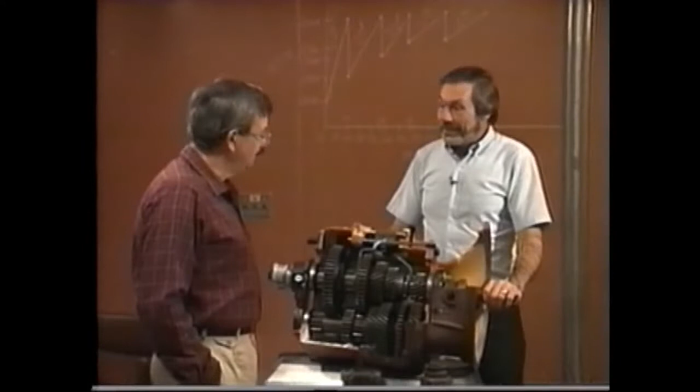We have a cutaway transmission here. We're going to show you what happens in the transmission related to what you do when you move the gear shift lever in the bus. We'll also tie together how you synchronize gears, find shift point matches, and that kind of thing.

We have a graph on the board that we'll deal with in a minute, and I'll have you fill one out. But mainly right now I'm interested in you understanding how this transmission works, because it's important for you to understand that so you know how to shift it and match the gear selections right, okay?

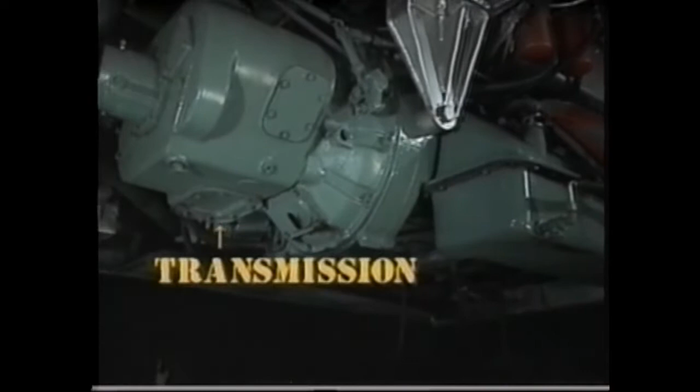Now, first of all, this is the part of the transmission that hooks to the back of the engine. If you remember the movie we looked at, The Powertrain, it showed basically how a smaller transmission works. You remember the U-joints and the drive line? Well, that hooks on right here and goes to the rear wheels, okay?

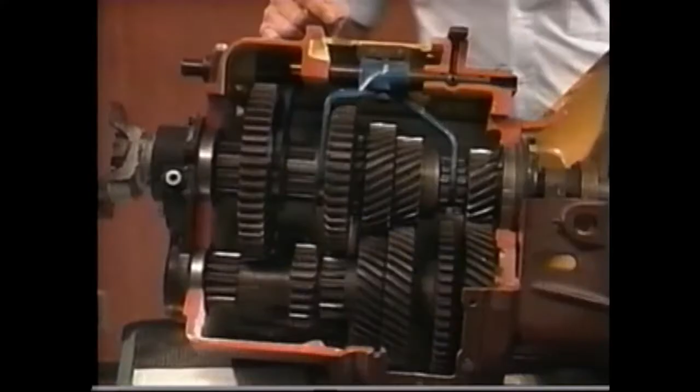Now I'll explain what the engine set of gears are first. Anytime the engine is running and the clutch is out, the gears you see turning here are turning with the engine. Now, correspondingly, we have a set of gears that are hooked to the back wheels. So when the back wheels turn, those gears turn.

Now, the important part to understand is that in each gear position — first, second, third, and so forth — there's actually two gears that make up that gear position. So if I say, John, put it in first gear, what you're actually doing is taking two gears and putting them together.

So when we're in first, we're looking at this gear and this gear. When we're in second, this gear and this gear. Looking at third, these two right here. Fourth, these two right here. Fifth, these two right here. And this is a miscellaneous gear we won't deal with. Way back under there, under that shaft, is another gear, and that's reverse.

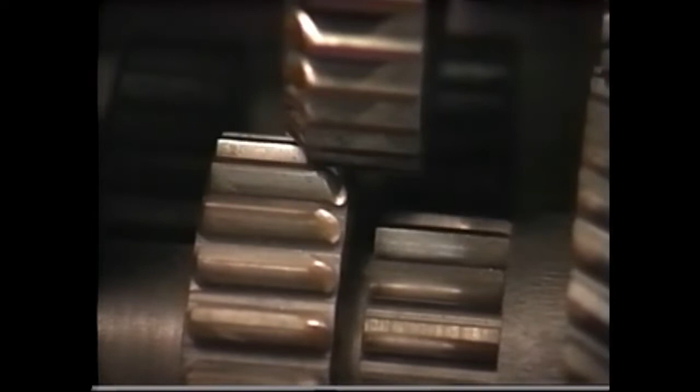Okay, if we take it out of second and put it in third, then we go into another ratio, and the rear wheels will continue to turn faster. Look, see how much faster that's turning?

Okay, now we'll put it in fourth. Now we're getting up to highway speed. Okay, now if we put it in fifth...

In a non-overdrive transmission, when you're in the highest gear you have, you are running direct. What that means is one revolution of the engine equals one revolution of the drive line, or the rear of the transmission. Does that make some sense?

Now what we have to learn at this point, once we understand basically how this works, is what we're going to do when we shift the bus. I've taken you through what this actually does, but what we don't know is how to match these so they don't grind, because the rear wheel gears may be turning at a different speed than the engine gears.

Okay, now before we go any further, let me add this also: if we look at this closely, we will see that half of each gear position is hooked to the engine and half of each gear position is hooked to the back wheels. This is half of first, that's an engine gear. Half of second, hooked to the engine. Half of third, hooked to the engine. Half of fourth, hooked to the engine.

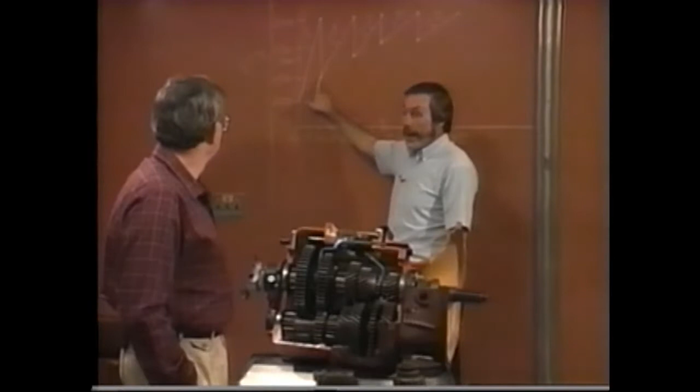Well, I do know how fast this one's turning, because it turns the same speed as this one. So if I return the bus speed to 10 miles an hour in second gear, hold it steady, and look at the RPM, it will tell me how fast this gear is turning. In this case it's 1,000 RPM, so we put a dot there on the graph. Then we repeat that process all the way up through fifth.

Take it up to the top of second, 2,000 RPMs, find out how fast you're going - 23 miles an hour. Put a dot on your graph at 2,000 RPM, 23 miles an hour. What's going on here is this gear is turning at 2,000 RPMs, and this gear is turning at 23 miles an hour.

Now we want to shift to third to set up our next shift point. So we're now in third. We return this gear to 23 miles an hour and hold it steady, then look at the tach to see how fast this gear is turning. We find that it's 1,300 RPMs. So we put a dot here at 1,300 RPMs at 23 miles an hour, which is the bottom of third - that's the shift point into third gear from second.

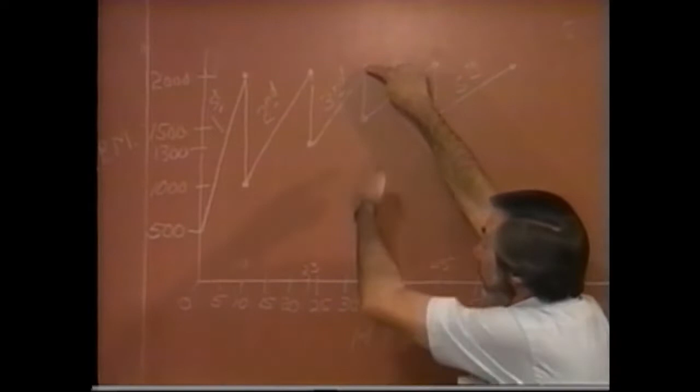Then you take your RPM up to 2,000 again for the top of third. You look at your speedometer and find you're running 34 miles an hour, so you put a dot at 2,000 RPMs, 34 miles an hour - that's the top speed in RPM in third gear. What's occurring here is this is your engine gear running at 2,000 RPMs, and your wheel gear is running at 34 miles an hour.

So now we can take it out of third gear and shift to fourth. We return the road gear to 34 miles an hour, hold it steady, look at the tachometer, and find that the engine gear is turning at 1,500 RPMs.

Right here, we took it up to 2,000, established our 34 miles an hour, shifted to fourth, reestablished 34 miles an hour, and found that it's turning at 1,500 RPMs. So we put a dot there.

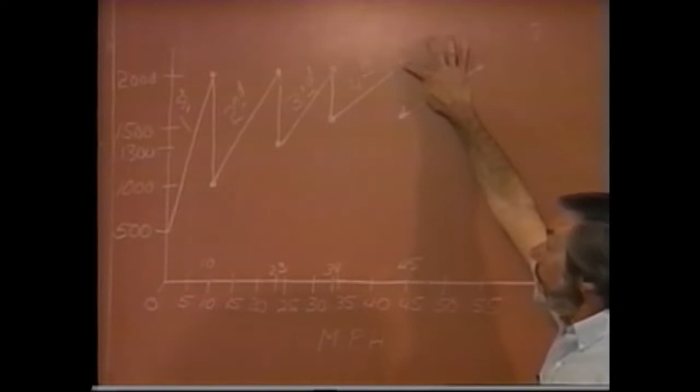Then you take fourth up to 2,000 RPMs, hold it steady, take a speed reading, which is 45 miles an hour, and put a dot on your graph at 45 miles an hour at 2,000 RPMs. Then we take it out of fourth gear and shift to fifth, returning the road speed of the bus to 45 miles an hour, then looking at our tachometer to see how fast the engine gear is turning, which again is at 1,500 RPMs, and we put a dot there at 45 miles an hour. That's our shift point into fifth gear.

Now we have them all set, okay? There's some things we can learn from that.

These are all your upshift points. From first to second at 10 miles an hour, you shift at 1,000 RPMs. From second to third at 23 miles an hour, you shift at 1,300 RPMs.

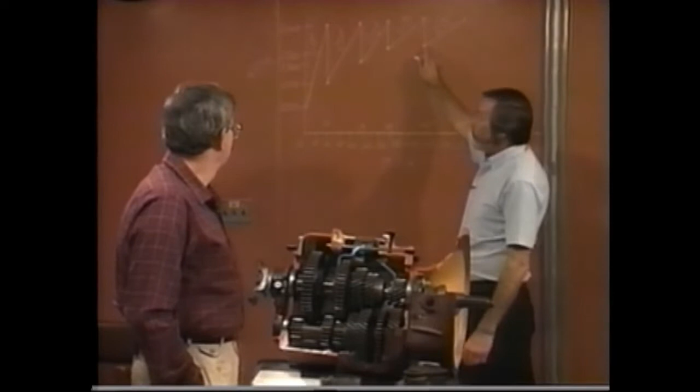From third to fourth, at 34 miles an hour, you shift into fourth at 1,500 RPMs. From 45 miles an hour, you shift from fourth to fifth, or you go into fifth at 1,500 RPMs. So those bottom dots are your upshift tachometer points, okay?

Now we also have some downshift points here, but we really haven't talked about that, have we? Because we have to match gears going down as well as up, or they're going to grind, all right? These are all your top RPM points, but they're also the downshift points at the top of the gear range.

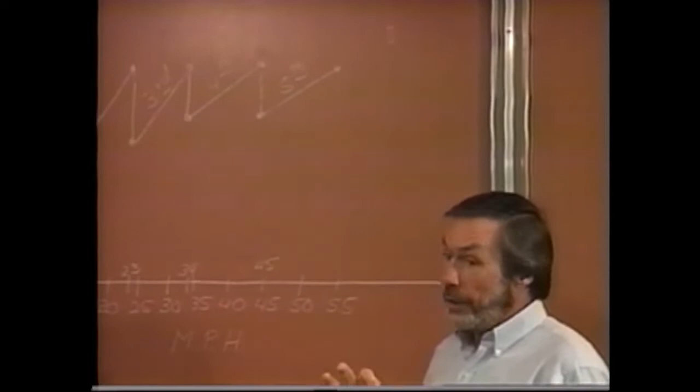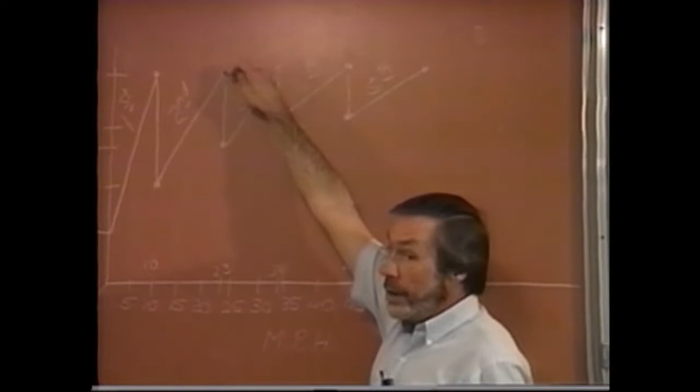Meaning if I'm in fifth, for example, and I want to downshift to fourth, I slow the bus speed down to 45 miles an hour, take it out of gear, raise the RPM to 2,000 RPMs, and I can put it in fourth gear. Same at 34 miles an hour, at 2,000 RPMs, I can put it in third gear. At 23 miles an hour, at 2,000 RPMs, I can put it in second gear. And at 10 miles an hour, at 2,000 RPMs, I can put it in first gear.

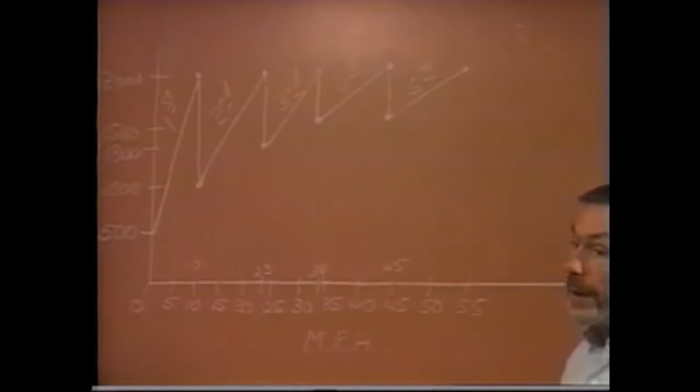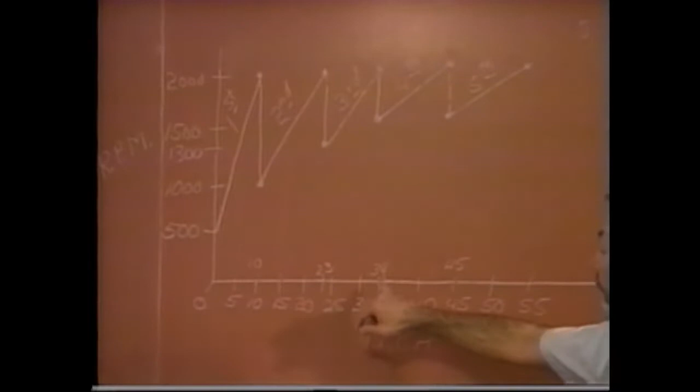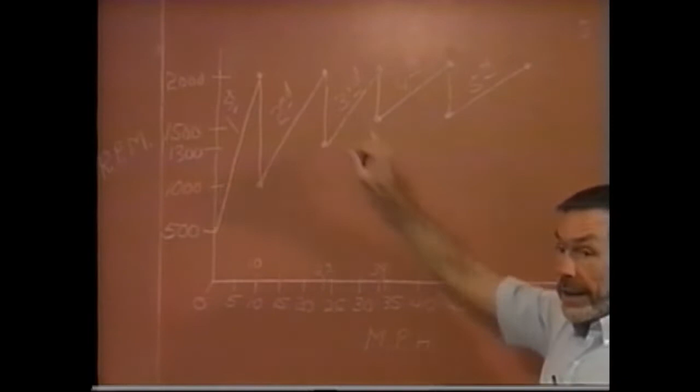Also, these bottom dots, as well as being upshift points, are also downshift points at the bottom of a gear range. For example, if I'm in fifth gear and I slow down to 34 miles an hour, I have a choice of either raising the RPM to 2,000 RPMs and going into the top of third, or raising them to 1,500 and going into the bottom of fourth. That's a bottom of a gear range.

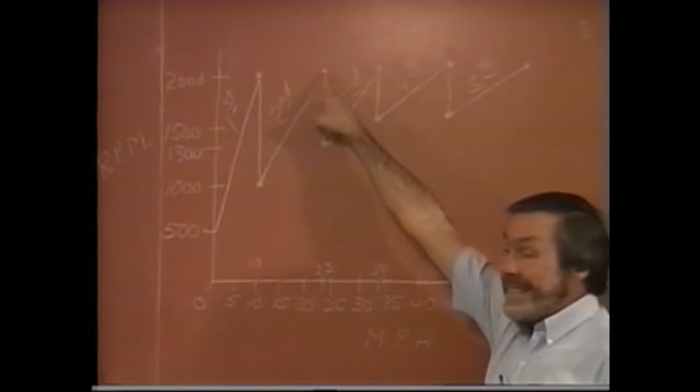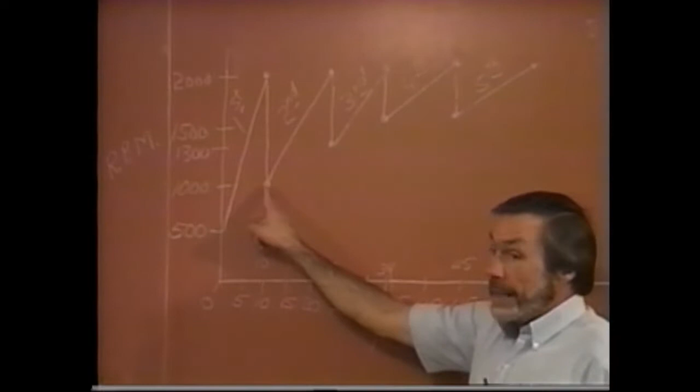At 23 miles an hour, I can go into the top of second at 2,000 RPMs, or I can go into the bottom of third at 1,300 at that speed. At 10 miles an hour, I can go to the top of first at 2,000 RPMs, or the bottom of second at 1,000 RPMs at the same speed.

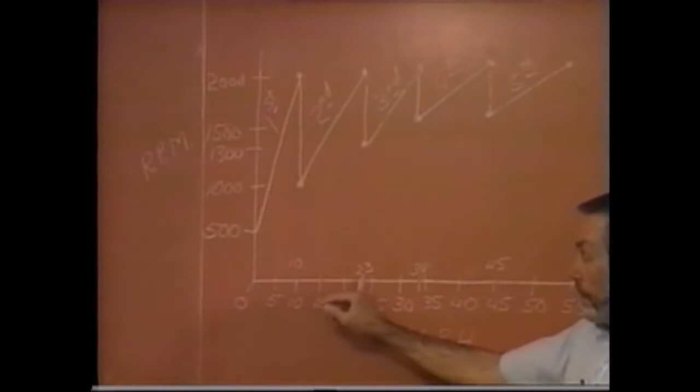Yeah, you can also skip a gear if you'd like. If you're in fifth, slow down, and want to go into second, all you have to do is set the speedometer at 23 miles an hour, take it out of fifth gear, raise the RPM to 2,000 RPMs, and go directly to second from fifth. It's not necessary that you downshift in progression.

So what we've just shown you is if you shift at 2,000 RPMs at the top speed, you're shifting down at the top of the gear range. If you shift at the bottom dots for the appropriate gear at the appropriate miles per hour, you're shifting at the bottom of the gear range.

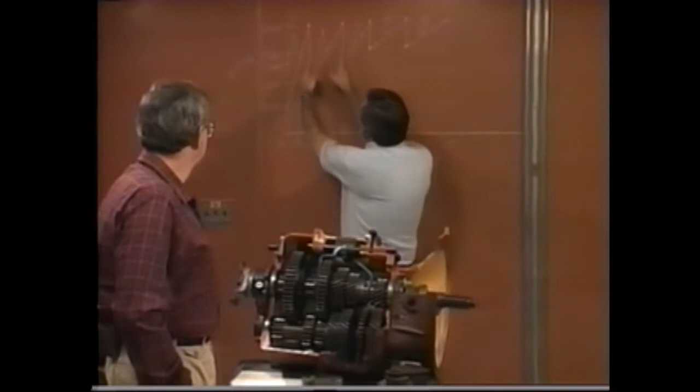Right? Mm-hmm. Now, there'll be times, John, and we'll show you this on the bus, that you may want to make a shift in between that somewhere. Like, let's say the gear range for second gear is 10 to 23 miles an hour. It's in this part right here, and this is your second gear line.

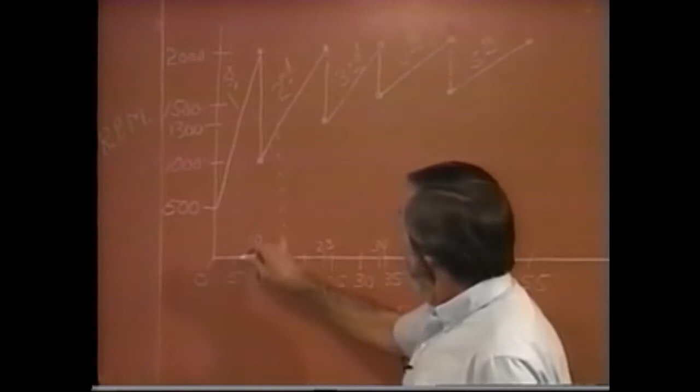Let's say we wanted to make a downshift to second at 15 miles an hour. On this graph, I can figure out what the match is on the RPM and the speed by doing this. You take the 15 mile an hour line, just draw a dotted line up to the gear line, which is second, and across to the RPM line, and we have the RPM that we can put that bus in second gear at that speed.

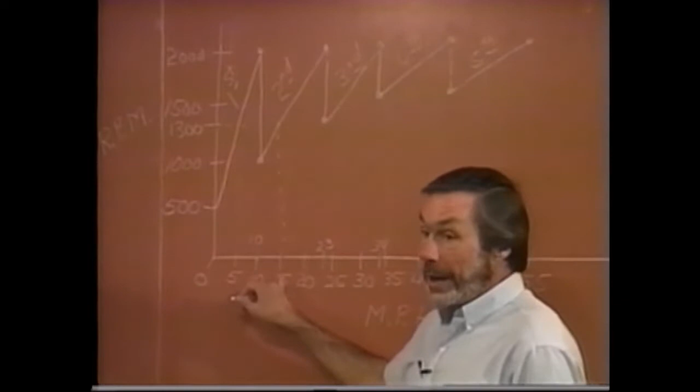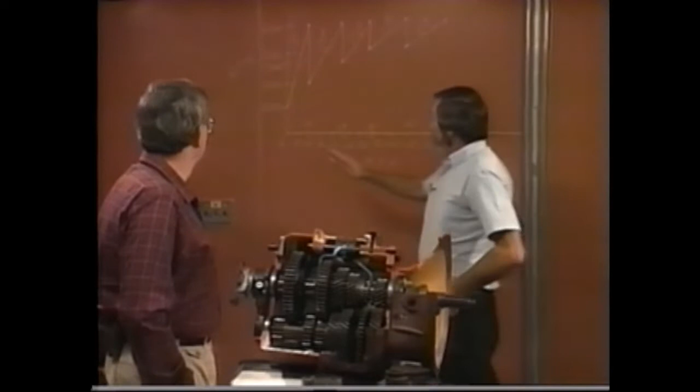And we'll show you how to do that on the bus with the instruments also. You can do that for each mile an hour on that graph if you want to get very sophisticated. In actual driving, there's probably 3 or 4 of those mid-range shifts that you should remember or learn about the bus you drive. One into first at probably 5 miles an hour.

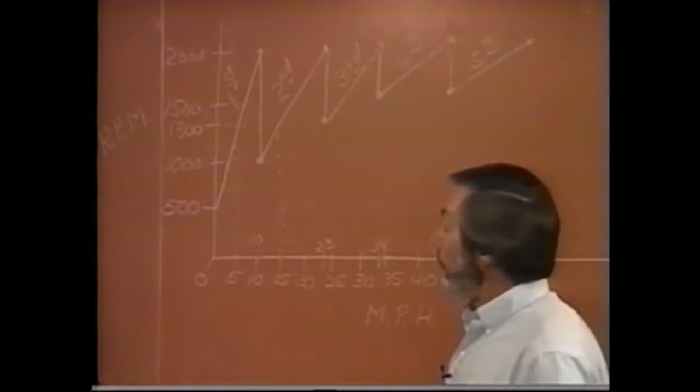You just go up to the first gear line and over to your RPM line. It looks to be about 1,100 RPMs. One into second, and maybe one into third at 25 miles an hour, are probably the most common ones you'll use during your driving career. But after you learn this and become proficient with it, you can certainly find others if you choose to and make them work for you.

Now, John, this concludes this part of the lesson. We showed you the transmission, how it works, how the graph works. In a later lesson, we will go out to the bus and actually put this into practice. We'll teach you how to use the instruments, how to shift the bus, find the shift points, do all of the upshifts and downshifts that we need to know as a driver, and you'll do very well. Do you have any questions about any of this? No, not at this time. It appears very clear.

Morning, John. Good morning.

Now this morning we're going to work on the shifting lesson. We're going to learn how to match gears in a standard transmission. There are a couple things we need to know about that. One is that we always do this kind of training in a controlled driving environment because you're going to be watching these gauges a lot. I'll help you watch the road, so you're not totally responsible for that part, okay? We'll be working at fairly slow speed to begin with.

Now, John, do you remember the other day in the classroom when we worked with the cutaway transmission? Yes. And we talked about the engine gears and the back wheel gears and how those matched? Yes. All right, the procedure we're going to teach you today is how to find that using the instruments on the dash. The tachometer is hooked to the engine set of gears, so we can read what they're doing on the tachometer. The speedometer is essentially hooked to the wheel set of gears, so we can read what they're doing on the speedometer.

Now we're going to do this in sections. Section 1 will be learning how to find the correct shift points using those two instruments. Section 2 will be upshifting once we know what those shift points are. Section 3 will be downshifting at the top of the gear range using the information we have learned from this setup procedure, or finding the shift points.

And then number 4 will be downshifting at the bottom of a gear range using the same information. Number 5 will be skipping a gear, either downshifting, for example, from 4th to 2nd, either at the top of the gear range or the bottom of a gear range. Number 6 is establishing a mid-range shift point. Now what that is, you may want to downshift somewhere between the top and the bottom, so we have a method of finding out exactly where the gears are matched so that you can make that happen.

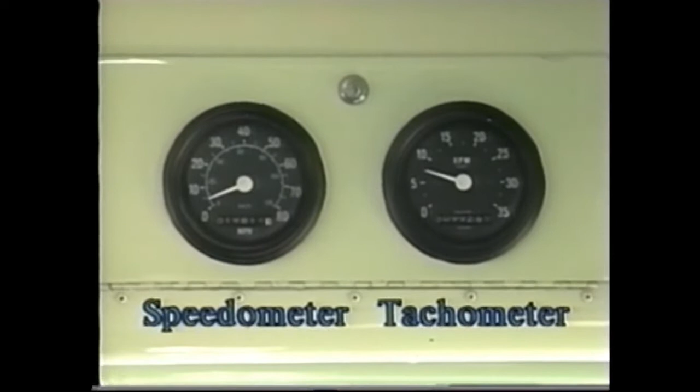Now, what we're going to be doing, John, is coordinating these two instruments and learning some things from them. We've established our top RPM is going to be 2,000 RPMs, so I want you to accelerate and raise the engine RPM to 2,000 and then hold it there steady. Take the time you need to get the RPM where you want it. One thing you don't want to do in this part is rush it.

All right, once we have 2,000 RPMs, you're setting on 2,000. What's your speedometer read? 10 miles per hour. All right, that's the top RPM and top speed for first gear.

Now we're going to make a shift to second: push the clutch down, move the stick to neutral, let the clutch up, adjust the RPM to where we think it should be, push the clutch down, put it in gear, and let the clutch up. All right, we're at 2,000 RPMs, and we have our speed reading. Okay, you ready to take it out of gear? All right, let's take it out of gear. Now we'll just kind of get it in second gear.

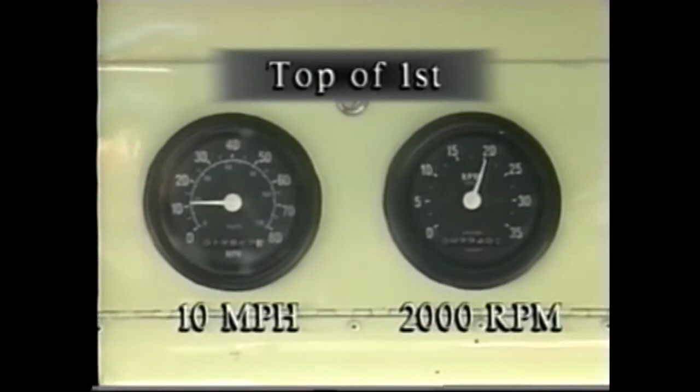Now, John, we're going to release the clutch with dead throttle. We're going to use throttle control during this shift, and that will allow us to match the engine gears with the back wheel gears, but you can only do that with the clutch up in neutral. Now we're going to take it up to 2,000 RPMs, push the clutch in, make a shift to neutral, let the clutch out, adjust our RPM setting to the shift point, push the clutch down, shift into next gear, let the clutch out. As you're going up, just practice your upshift points.

All right, you're doing very well.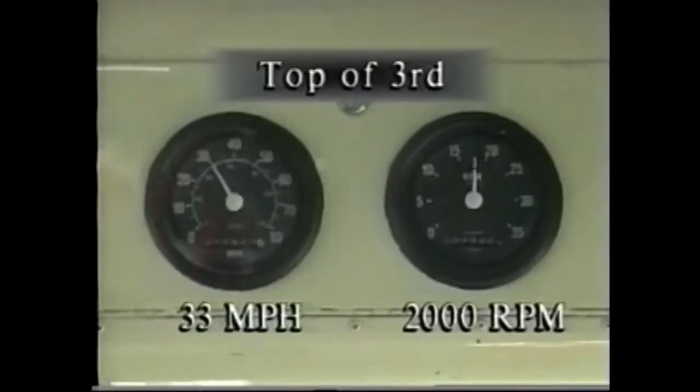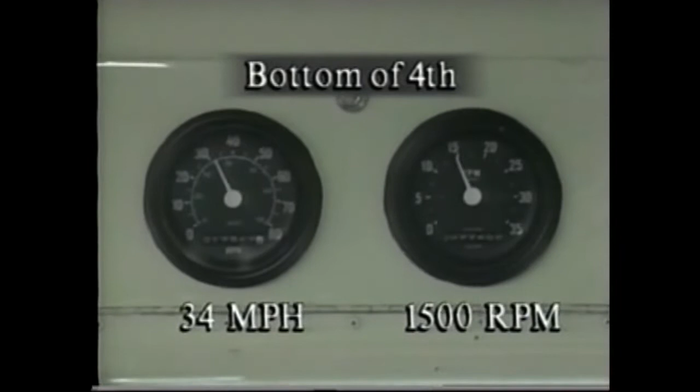Clutch up, now try it. All right, now just cruise till we get on the other side, John. And then we're going to start downshifting at the top of the gear range.

Now, that simply means that we're going to take the setup procedure that we learned, the top speeds for each gear, and we're going to reverse that to use it so we know where the downshift points are.

Now, for example, we're in fourth gear, the top speed of third is 33 miles an hour, is that what it was? 34 miles an hour, okay. So what you do is you set the speedometer on 34 miles an hour, push the clutch down, take it out of fourth gear, put the transmission in neutral, raise the RPM to 2,000 RPMs, hold it steady, push the clutch down, downshift to third, and let the clutch out.

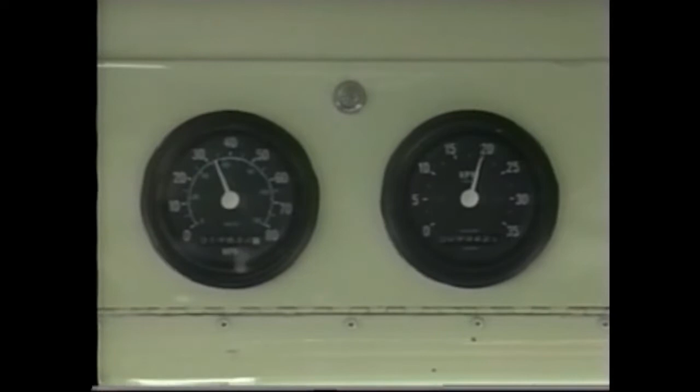All right, so I'm at 34 miles per hour. Okay, now just slide it out of fourth gear and raise the tachometer to 2,000 and hold it there, and put it in third. There you are. Perfect match, very smooth, everything's set.

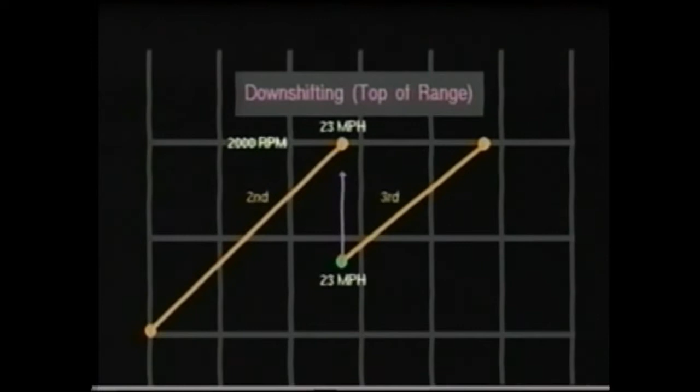All right, now we can do the same thing at the top of second. What was the top speed for second? 23 miles an hour. So slow it down to 23 miles an hour. And we'll take it out of gear, raise the RPMs to 2,000, hold it there, and we'll downshift to second. 23 miles per hour. Right.

Now just slide it out of gear, raise the RPM to 2,000, hold her steady, push the clutch in and shift it. See, they're all perfect matches.

They go in, no grind, everything works like it's supposed to. Now, they've told us for a long time that you can't shift into first gear moving, but you can if those gears are matched. So what do we need to do to shift into first gear based on what you know now? We have to reduce the speed to 10 miles an hour, slip it out of gear, and then bring the RPM back up to 2,000 RPM and shift into first. Very good. Let's try that.

Okay, 10 miles per hour. Now let's slide it out of second gear. Raise the RPMs to 2,000. Pull it down into first gear. There you are. As long as you hold that RPM there and use correct throttle control, those matches will be very good on the gear.

You'll have the clutch matched, everything will be smooth, just like you want it. Okay, you're doing fine with that, John. Now let's move to the next part, and we'll do some downshifting at the bottom of the gear range. Okay, so go ahead and upshift from first to second, second to third, third to fourth. Get it to fourth gear, and then we'll start that process.

All right, now we're going to downshift from fourth to third, except we're not going to do it at the top of the gear range. We're going to do it at the bottom. So at the speed that you went into third gear going up was 23 miles an hour. And the RPM was 1,300 RPMs, right? That you went into third gear. Okay, so we're in fourth.

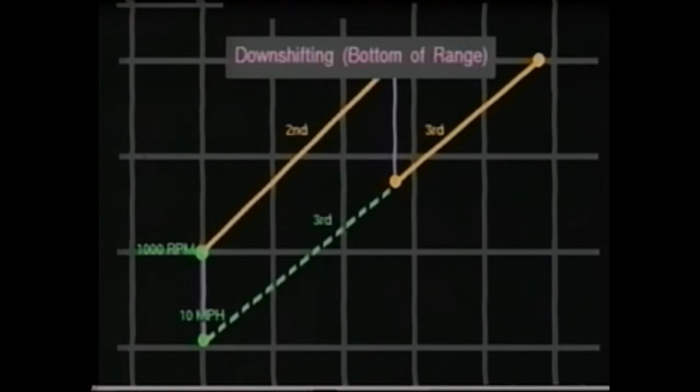All right, now let's do a shift into second at the bottom of the range. So we use the bottom speed for second, which is 10 miles an hour. And the RPM that we went into second on the upshift was 1,000 RPM, right? Right. Okay, so that's the points we need, you got it right there. Now just slide it out of third. Gently roll it up to 1,000 RPMs and hold it and make your shift. Very, very good.

Now go ahead and go around the curves here, and we'll get back over on the flat part of the track. And as you're driving, I'm going to explain to you what we're going to do in the next part. All right. All right.

Now that you know how to effectively downshift at the top of the gear range and also at the bottom of the gear range, you may be in a situation, and more than likely you will be in your driving career, where you'll be in a higher gear and it won't be safe to shift down progressively. So you're going to have to skip a gear. We're going to put it in fourth gear when you get leveled out over here, and we're going to make a downshift from fourth directly to second. Now we can do that either at the top of the range or the bottom of the range, just like we practiced, right? As long as you know what speed you want and the corresponding RPM, you can make that shift.

So let's go ahead and get it in third gear, and then go ahead and shift to fourth. Good. Now go ahead and upshift to fourth.

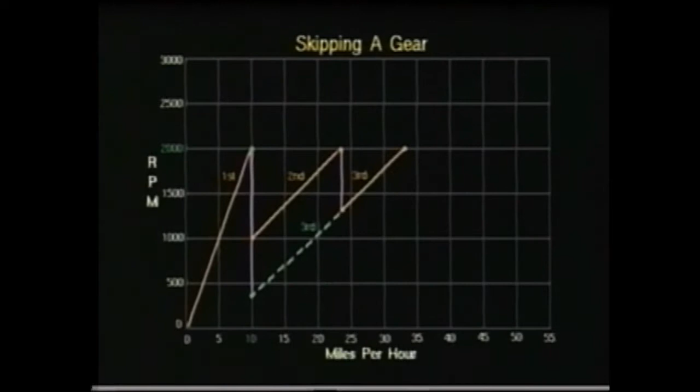All we need to know is the top speed for first gear, which was 10 miles per hour, and the top RPM for first gear, which was 2,000. So let's slow the bus down to 10 miles an hour, and when you have it there, cruise it at that speed. Then we'll take it out of third gear, raise your RPMs to 2,000, and put it in first.

Good shift. All right, now just slow down and cruise here for a minute. Now you've done very well so far on your setup procedure, on your upshifting, downshifting at the top of the range, downshifting at the bottom of the range, and skipping a gear. Now let's spend some time practicing these items, and we'll get a little more proficient in the process.

Okay John, now that you've practiced the previous steps and all the downshifting procedures, now we're going to teach you one more. This one is something that drivers use a lot, and it's necessary that you know how to find this shift point, and it's called a mid-range shift point. You may find that sometime you want to shift into second gear and you're not at the bottom and you're not at the top. In fact, that's a real common one on right turns. The driver will make a shift into second in the middle of the range somewhere. Now there's a procedure to find out exactly what those shift points are, and that's what we're going to show you.

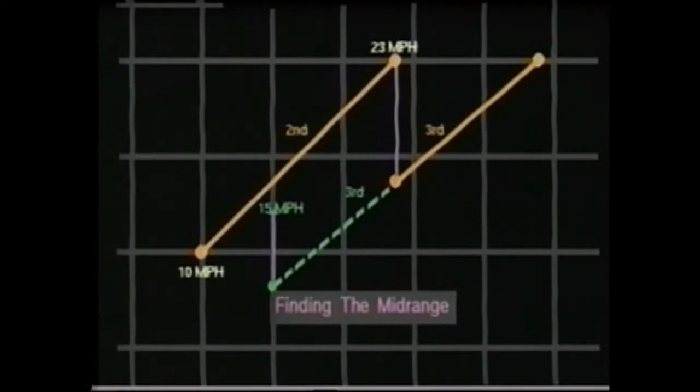This is one of the easiest parts of the shift point lesson, is finding this mid-range. People make it a lot harder than it is. So when you get down on the flat over here, go ahead and upshift to third, and we'll slow down and make that shift.

Up a little. All right, we're in third gear. Now slow the bus down to 15 miles an hour. The shift point that we established was 1300 RPM.

Just cruise it at 15 miles an hour. Did 15? Now just take it out of third gear, gently raise it to 1300 RPMs, hold it steady, and make a shift. There it is. Perfect match.

Now let's do one more just to make sure we know how to do this. So slow down and downshift to first. We're gonna set one up for first gear. At 10 miles an hour, we can downshift at 2,000 RPMs, right? So go ahead and do that.

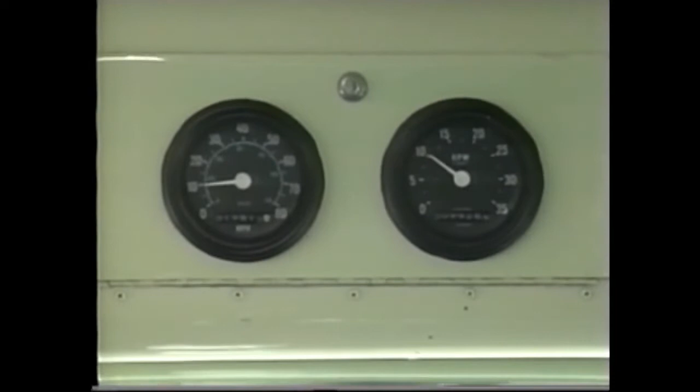Now go ahead and upshift to second, and then we'll slow back down and try that. Okay, now just slow it back down to 5 miles an hour. What was our shift point? 5 miles per hour and 1,000 RPM.

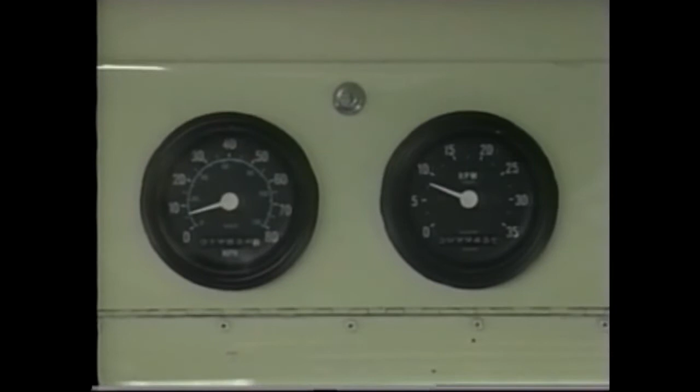Okay, when we get it to 5 miles an hour, just gently slide it out of second. Raise your RPM to 1,000 and gently slide it into first. Just push the clutch in. Okay, we got it? Got it. Push the clutch in, slide it out of second, down. Now raise your RPM to 1,000. Slide it right into first. You're moving. Okay, now pull over to the side and stop for a second.

Now does what we've covered so far make sense to you? Yes, it does. The one thing I want to point out is, we've done this on this bus, but you may be working for an operation that has 5 different kinds of buses with standard transmissions. This method will work on any vehicle that has a working speedometer and a working tachometer. The numbers may be different, the speeds may be different, the RPMs may be different, but the method will work. So all you need to do, if you work for an operation with a different bus, is find out the top RPM of that engine. That's all you need to know, and apply this method. You can find the exact shift points for that piece of equipment.

Larry, how do I keep track of the shifting points on the different buses I may be driving? John, remember when we did the classroom lesson and explained the transmission, and the graph I put on the board that we had you fill out? Yes. And also the shifting chart that showed you how to log the shift points we were working with today? Yes.